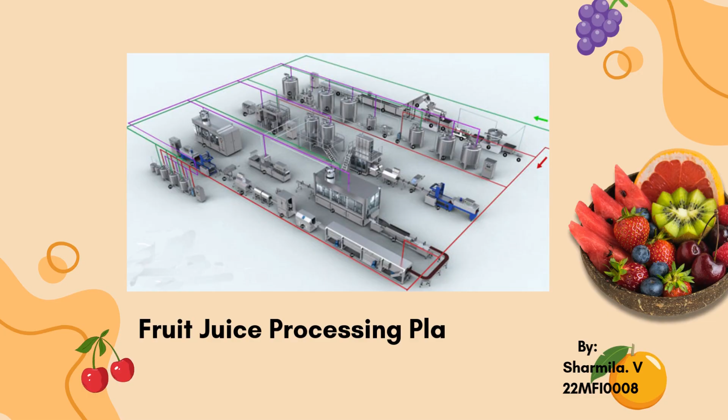Welcome! In this video, we'll explore the layout of a fruit juice processing plant, step by step, from raw fruit reception to packaging. By the end, you'll understand the key areas, their sequence, and why layout matters for efficiency and safety.

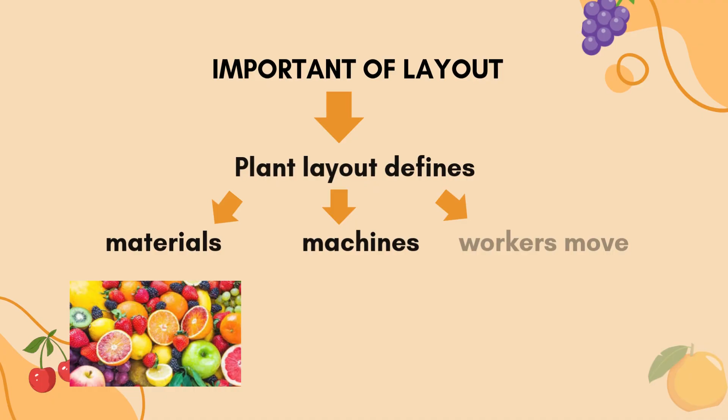Plant layout defines how materials, machines, and workers move. A good layout ensures smooth flow, minimizes contamination, reduces cost, and saves time.

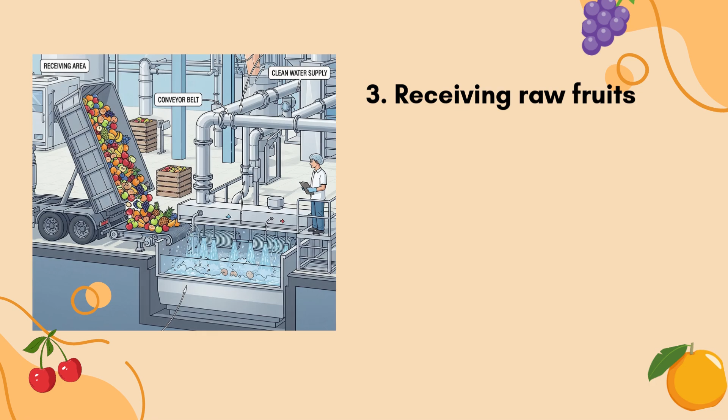Every juice plant begins with receiving raw fruits. Trucks unload fruits into the reception area. The fruits go through sorting and washing to remove dirt, debris, and pesticide residues.

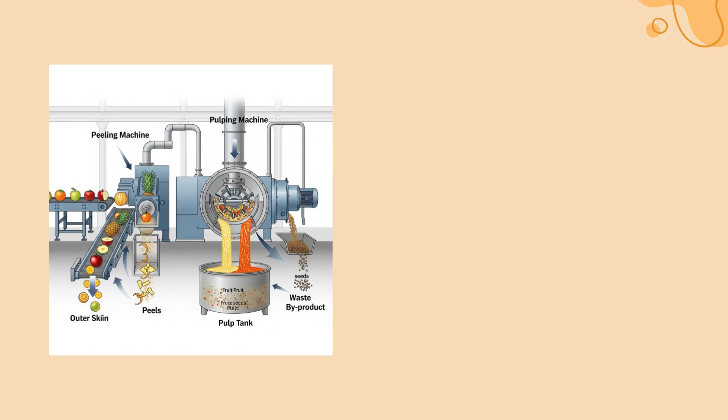Next, fruits are peeled and cut. Depending on the fruit type, mechanical pulpers extract the pulp. This section must be hygienic and well ventilated.

The extracted juice undergoes pasteurization, heating to destroy harmful microbes. Proper layout ensures that pasteurizers are close to the pulping section but isolated from raw areas to prevent cross-contamination.

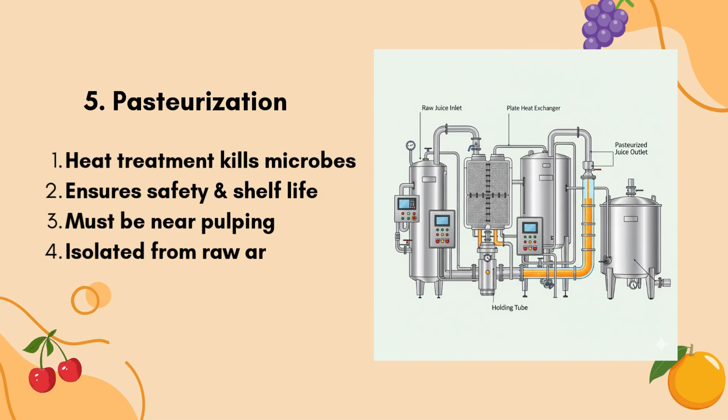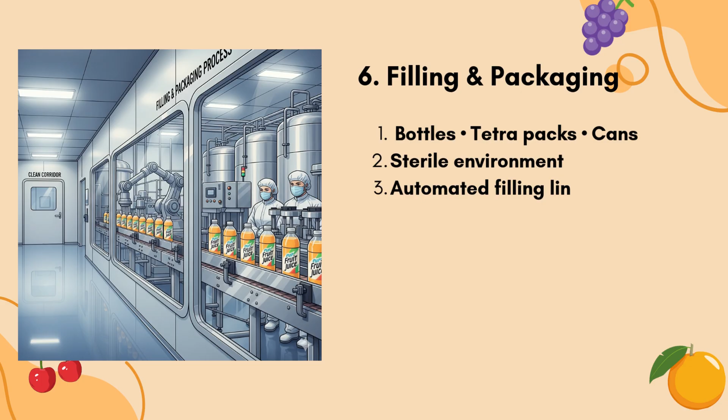After pasteurization, juice is filled into bottles, Tetra Paks, or cans. This section requires sterile conditions. Automated filling lines and packaging machines are arranged in sequence for smooth flow.

Storage and dispatch: finally, packaged juice is moved to cold storage or dry warehouses before dispatch to markets. Proper storage ensures product quality and shelf life.

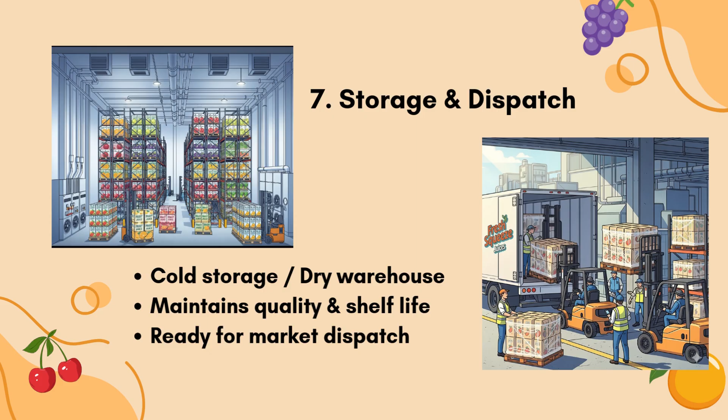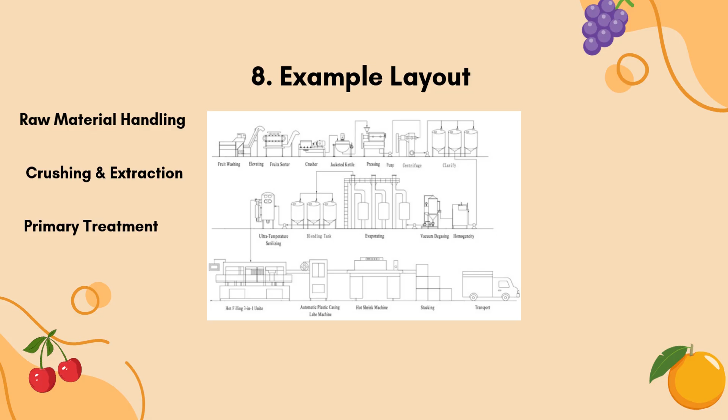Step 2: Crushing and extraction. Fruits are pulped and juice is separated. Step 3: Primary treatment. Juice undergoes filtration, heating, and homogenization.

Step 4: Advanced processing. Sterilization, blending, and evaporation extend shelf life. Step 5: Concentration and drying, an optional step to make juice concentrates or powders.

Step 6: Packaging. Juice is filled into bottles, cartons, or pouches. Step 7: Testing and dispatch. Quality checked products are stored and sent to markets.

This systematic flow ensures safe, hygienic, and high-quality juice production.

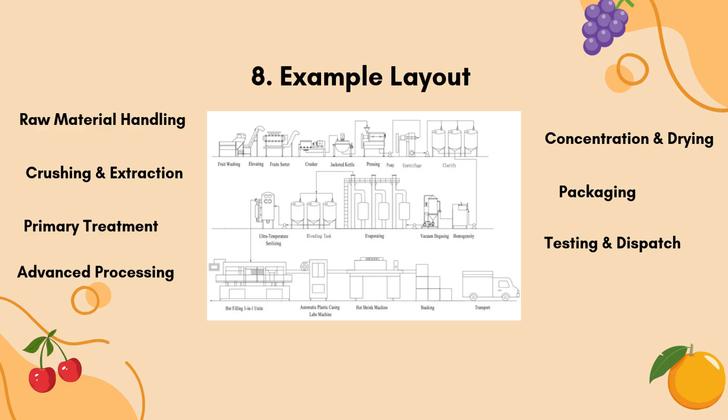Key takeaways and wrap up. To recap, fruit juice plants must have a hygienic, efficient, and linear layout. Proper zoning reduces risks and boosts productivity.

Safety considerations in layout. Worker and equipment safety is critical. Layouts should include wide aisles, emergency exits, fire safety systems, and clearly marked zones for chemicals like cleaning agents.

Quality control and lab section. Most juice plants have a quality control laboratory located near the processing line. Samples are tested for pH, sugar content, microbial load, and packaging integrity. Placing the lab close by ensures faster feedback.

Employee facilities. Separate facilities for staff are essential. Locker rooms, hand-washing stations, and cafeterias should be placed outside processing zones but close enough for convenience. This helps maintain hygiene and worker morale.

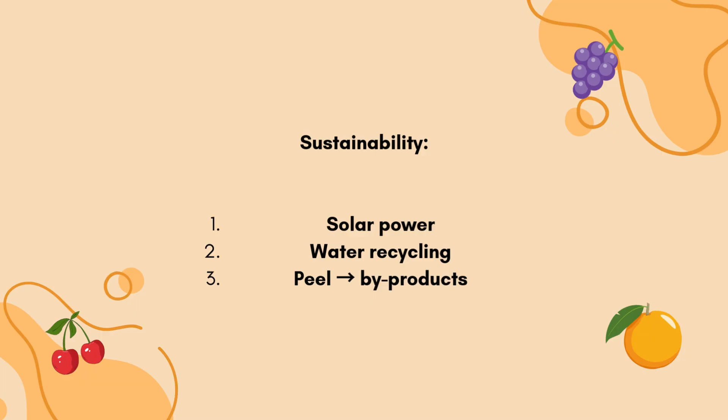Environmental and sustainability aspects. Modern plants consider sustainability. Solar panels, water recycling systems, and byproduct utilization, like turning fruit peels into pectin or animal feed, reduce environmental impact and add value. Case example: small mobile juice plant.

A new trend is mobile juice plants, small units mounted on trucks or containers. These are useful during fruit harvest seasons in remote areas. Layouts are compact, but still follow the same raw-to-packaging sequence.

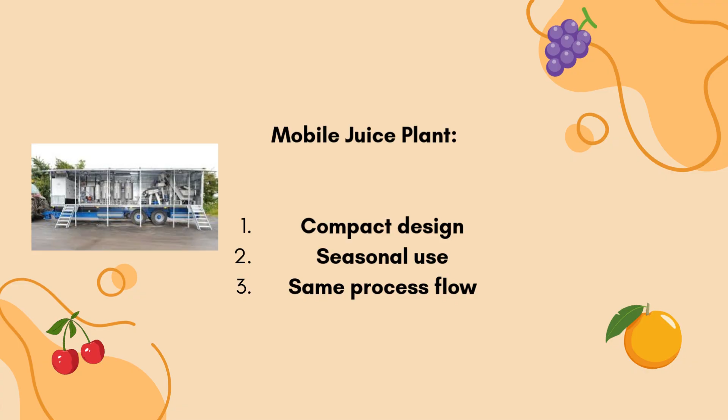Final recap plus quiz. Let's summarize. A fruit juice plant layout covers raw reception, washing, pulping, pasteurization, packaging, and storage. It must follow hygiene zoning, safety, and sustainability principles.

Now, pause and answer: Why should pasteurization be separated from raw areas? What is FIFO in storage? Give one sustainable practice in juice plants.

Fruit juice plant layouts: Small versus large scale. We'll compare layouts of small scale and large scale fruit juice processing plants. You'll learn the differences, advantages, limitations, and which suits different business goals.

Introduction to scale. Plant scale affects cost, equipment choice, automation, labor, and efficiency. A small-scale unit might process just 500 liters per day, while a large industrial plant may handle thousands of liters per hour.

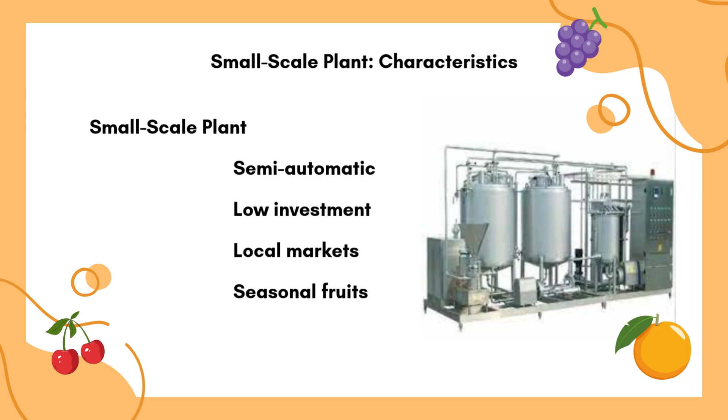Small-scale plant characteristics: A small-scale juice plant is typically semi-automatic, requires lower investment, and is ideal for startups, local markets, or seasonal fruit utilization. Space requirement is smaller, and operations are simpler.

Small-scale layout, step by step: reception, washing, manual cutting and pulping, pasteurization in small kettles, hand filling and capping, storage. The focus is on low cost, flexibility, and direct market supply.

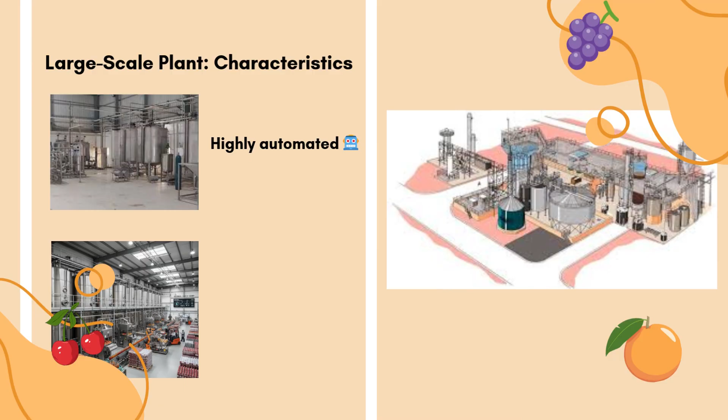Large-scale plant characteristics: Large plants are highly automated, need high capital investment, and serve regional or global markets. Layouts prioritize efficiency, hygiene zoning, and bulk storage. They often run continuously with high throughput.

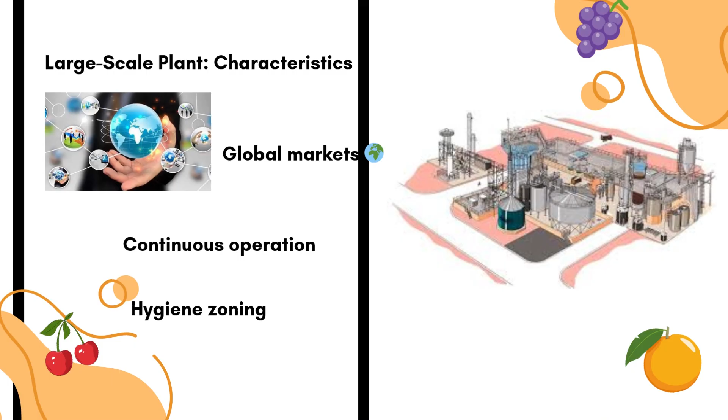Large-scale layout, step by step: automated fruit unloading, conveyor washing, industrial pulping lines, continuous pasteurizers, automated filling lines, robotic packaging, cold storage, and large dispatch bays. This design maximizes output while maintaining strict food safety standards.

Key differences, side by side, of small and large-scale plants: Small-scale plants rely on manual labor, low investment, and flexible production, while large-scale plants rely on automation, higher investment, and efficiency at scale. Small units serve niche markets, while large units serve mass consumption.

Case example, small plant: A village-level mango juice plant can process 1 ton of fruit daily using simple pulpers and gas pasteurizers. The juice is sold in bottles to nearby towns.

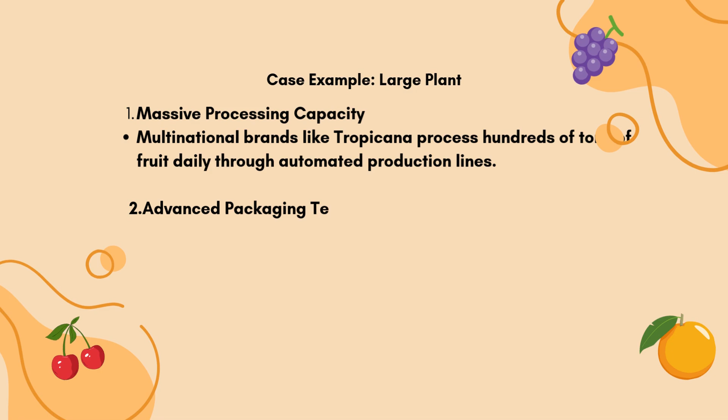Case example, large plant: Multinational juice brands like Tropicana or Real set up plants processing hundreds of tons daily, with automated lines, aseptic packaging, and exports worldwide.

Choosing the right scale. Scale choice depends on capital, target market, availability of raw fruits, labor, and demand. Many entrepreneurs begin small and expand as demand grows.

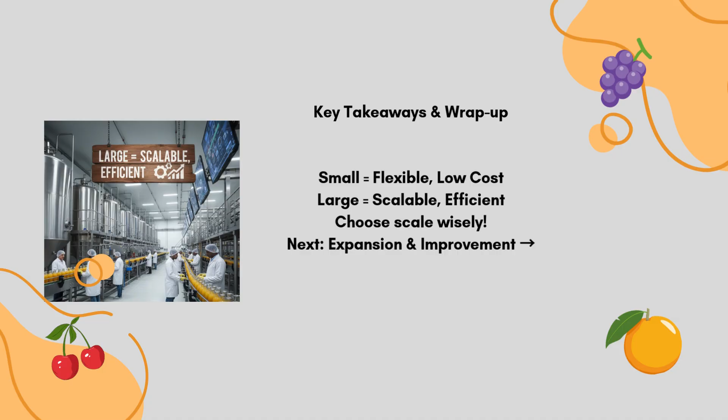Key takeaways and wrap up. In summary, small plants are cost-effective and flexible but limited in capacity. Large plants are efficient and scalable but require heavy investment. Understanding these layouts helps design facilities suited to specific needs.

Next, we will continue with improvements and expansions in plant design for juice processing. In our next video, we'll explore improvements and expansions in plant design. As juice demand increases, plants must scale up, modernize, and optimize their processes. Today, we'll look at how small units evolve into large-scale, efficient operations.

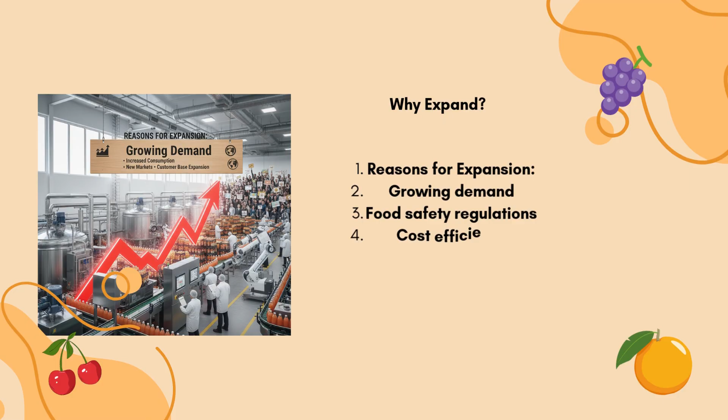Why expand? Expansion is driven by rising consumer demand, competition, food safety requirements, and export opportunities. A plant that processes 500 liters per day today may need to process 5,000 liters tomorrow.

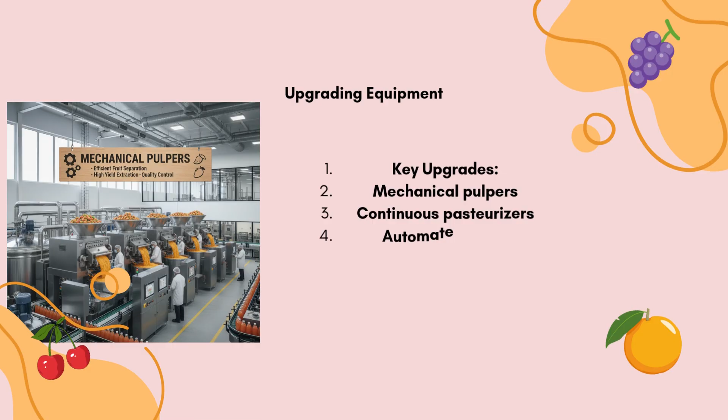Upgrading equipment. Small plants often rely on manual equipment, but as production scales, semi-automatic or fully automatic systems are needed. For example, manual pulping can be replaced with mechanical pulpers that handle several tons per hour, improving consistency and hygiene.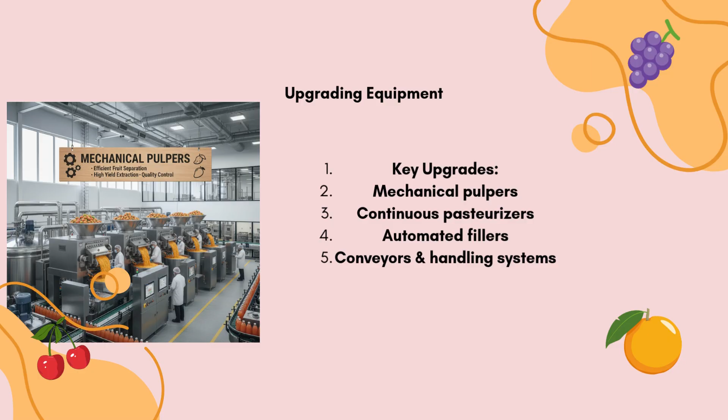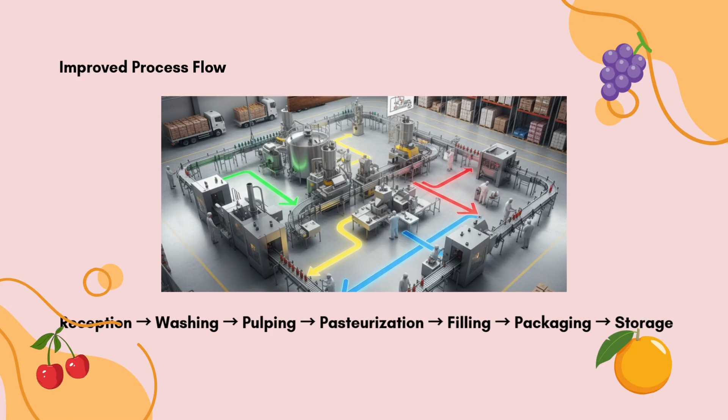Improved process flow. A small unit may have a linear, manual flow, but larger plants use layout optimization. Raw material reception, processing, filling, and storage are designed for minimal movement and maximum efficiency.

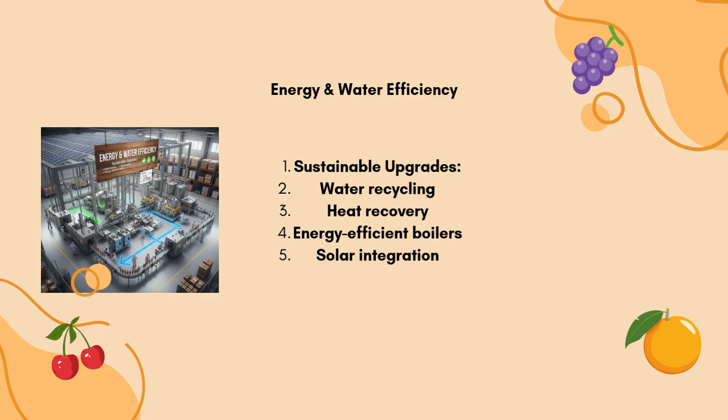Energy and water efficiency. Expanding plants must also think about sustainability. Modern facilities recycle process water, use energy-efficient boilers, and recover heat from pasteurization systems.

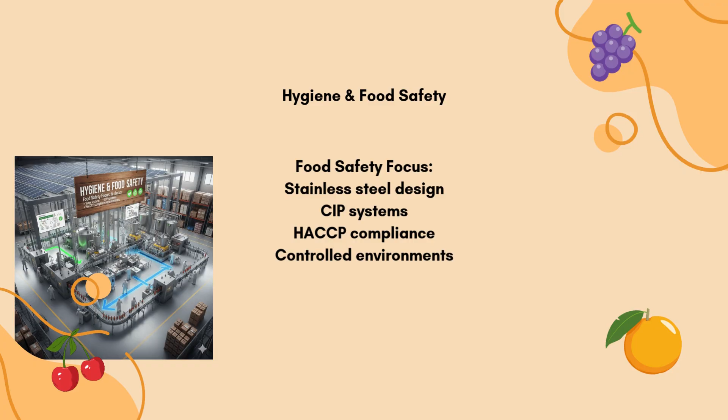Hygiene and food safety. With expansion comes stricter hygiene needs. Stainless steel piping, clean-in-place (CIP) systems, and HACCP-compliant layouts reduce contamination risks.

Automation and digitalization. Automation transforms plant efficiency. From digital sensors monitoring pasteurization temperature to SCADA systems controlling the entire line, expansion brings Industry 4.0 into food processing.

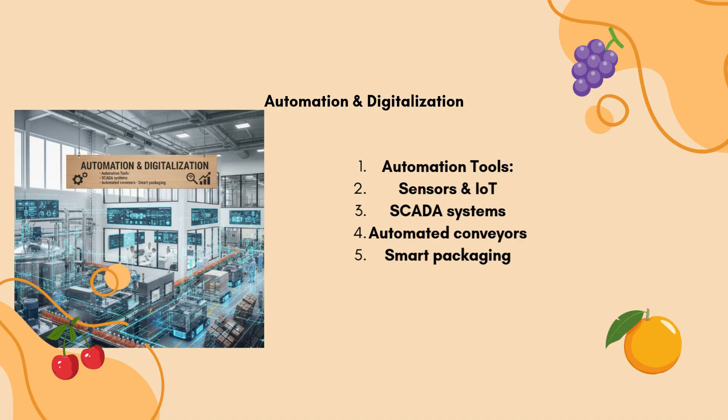Packaging innovations. As plants expand, packaging must also evolve. Instead of manual glass bottle filling, automatic PET bottle lines, aseptic cartons, and shrink wrapping systems are introduced.

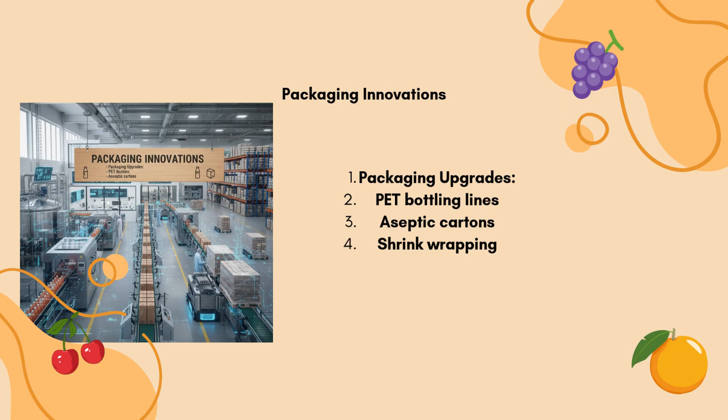Workforce and trainings. Expansion isn't just about machines, it's about people. Workers must be trained in safety, machine handling, and quality control for smooth operations.

Case study example. Let's take an example. A small fruit juice unit in Maharashtra started with 500 liters per day, using manual pulping. Within 5 years, they expanded to 10,000 liters per day with mechanical pulpers, automatic pasteurization, and aseptic PET bottling. Their market grew from local shops to exports.

Future directions. The future of plant expansion lies in sustainability and smart technologies: AI-driven predictive maintenance, blockchain for traceability, and green packaging materials.

Supply chain integration. Plant design doesn't stop at the factory walls. Modern juice plants are integrated with supply chains, from farmer collection centers to cold chain logistics. This ensures raw fruits reach the plant fresh, and finished products reach markets efficiently.

Waste management and byproducts. A major expansion consideration is waste handling. Skins, peels, and seeds from fruits can be turned into pectin, animal feed, or bioenergy. This not only reduces waste but adds revenue streams.

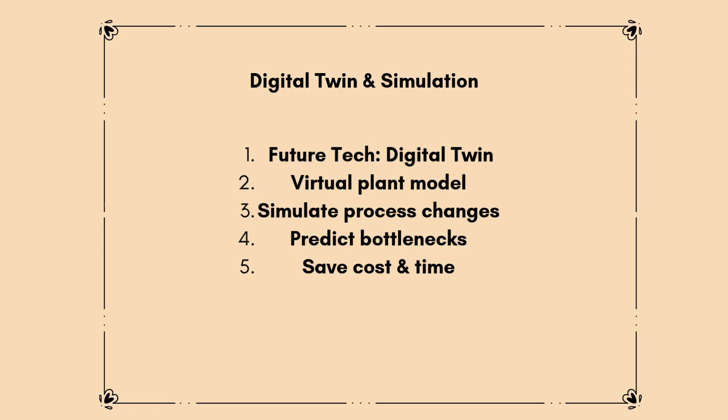Digital twin and simulation. One exciting innovation is the use of digital twins, virtual models of juice plants. These allow managers to simulate process changes, test layouts, and optimize efficiency before investing in physical infrastructure.

Global trends in plant design. Globally, fruit juice plants are moving towards sustainability, traceability, and customization. From blockchain for food safety to personalized nutrition juices, the next decade promises rapid transformation.

Safety and hygiene standards. An essential part of plant design is ensuring worker and consumer safety. Juice plants follow hygiene protocols like foot baths, protective clothing, and pest-proof facilities. Designing with safety in mind protects both the product and the people who handle it.

Economic and market considerations. Designing a fruit juice plant is not just about machinery, it's also about economics. Small-scale plants focus on direct sales and local markets, while large-scale plants aim for exports and branding. Market analysis and cost-benefit planning are crucial steps before expansion.

Future trends in plant design. Looking ahead, the fruit juice industry is adopting smart technologies. IoT sensors will allow real-time monitoring, AI will optimize production schedules, and robotics will handle repetitive tasks. Plants of the future will be digital, sustainable, and globally connected.

Final summary and closing. In this video, we explored the fundamentals of juice plant layouts, compared small and large-scale facilities, and discussed improvements and expansions. We also looked at safety standards, economic planning, and future trends. From farm to bottle, every design decision shapes quality, efficiency, and sustainability.